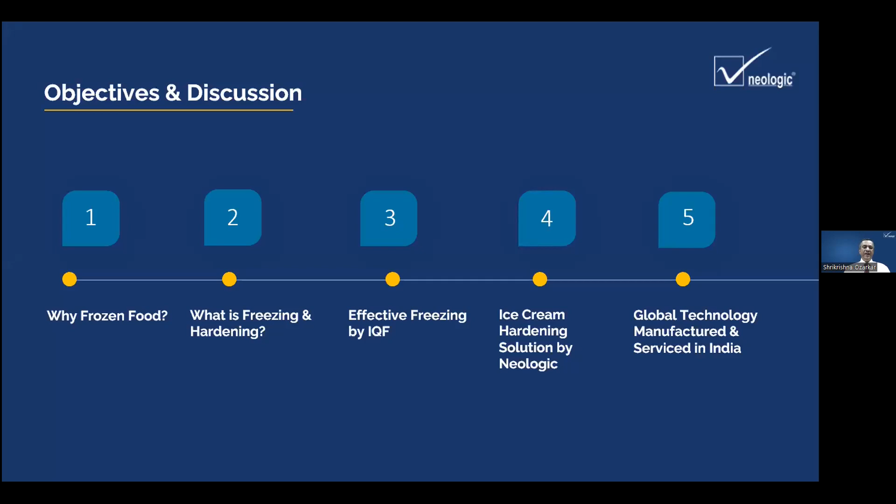So first, let's try to understand why frozen food. Let's understand the market scenario as well. The frozen food market is one of the largest and most dynamic sectors in the food industry. In spite of considerable competition between the frozen food industry and other sectors, extensive quantities of frozen food are now being consumed all over the world.

Let's also understand freezing and preservation by freezing. Freezing, being one of the best techniques of food preservation, is widely used for retaining taste, texture, and nutritional value in agricultural products over long storage periods since a long time now.

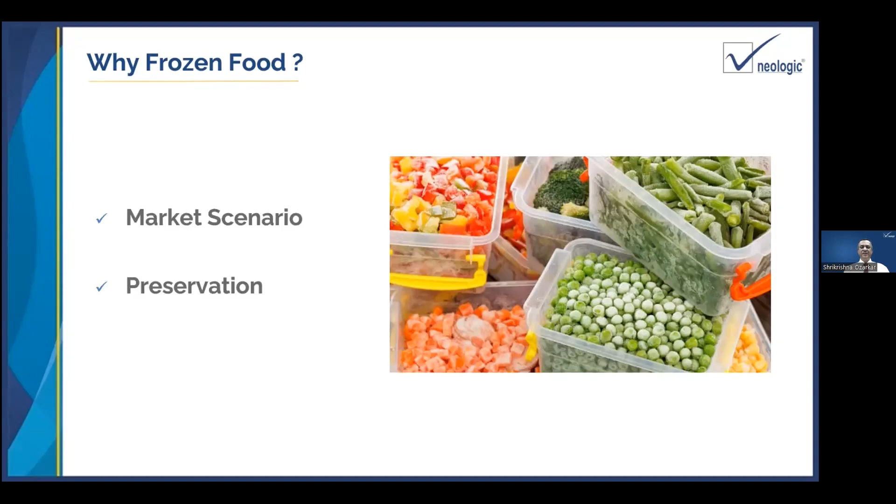So what is freezing and hardening? Let's see. The freezing process is a combination of beneficial effects of low temperature, at which microorganisms cannot grow, chemical reactions are reduced, and cellular metabolic reactions are delayed.

Let's also understand freezing for preservation. Freezing delays spoilage and keeps the food safe by preventing microorganisms from growing and by slowing down the enzyme activity that causes the food to spoil. As the water in the food freezes into ice crystals, it becomes unavailable to these microorganisms for growth.

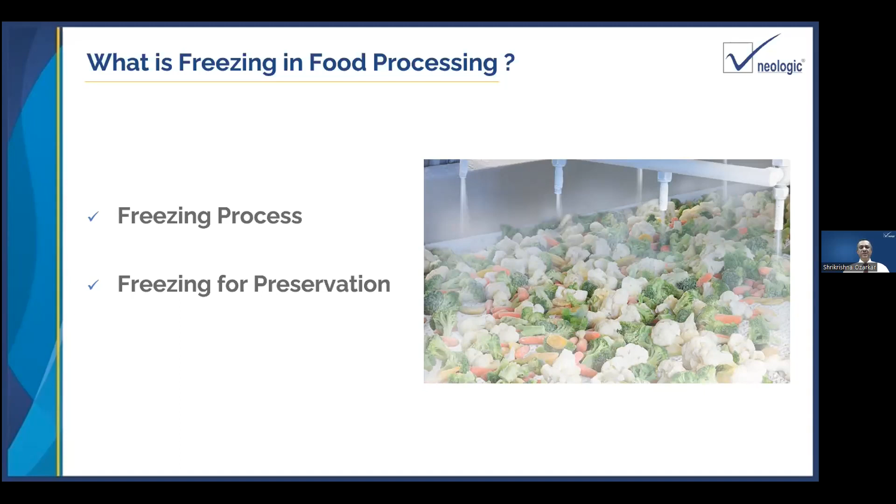Now let's look at ways of freezing, starting with the spiral freezer. The picture you see in the slide is a spiral freezer, which can be used for various applications - ready to eat items, fruits, vegetables, or many other items including paneer, cheese, meat, or chicken. The freezing process accomplished with spiral freezers is very popular these times, mainly due to the space saving and energy saving features of spiral freezers over conventional freezers.

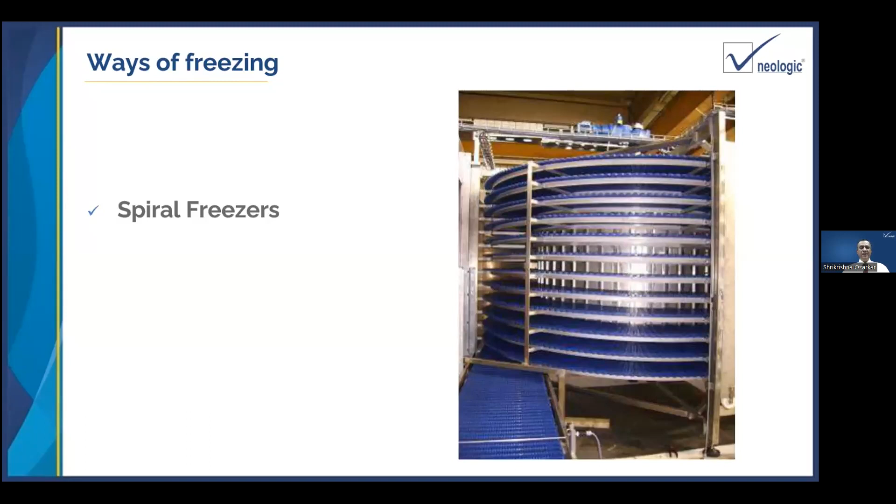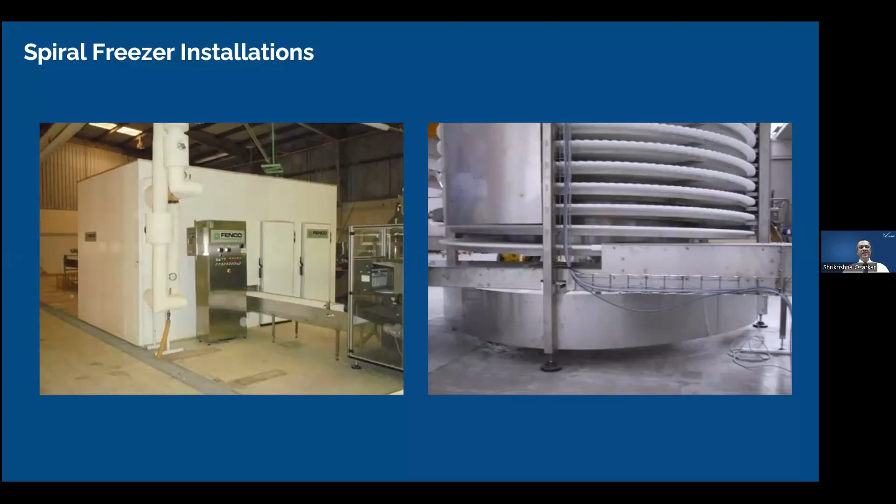Spiral freezers can be used for a variety of applications in the food industry, as I mentioned earlier. Let me explain some other spiral freezer installations in the photo here. On the left-hand side, you see a complete cabinet for the spiral freezer. On the right-hand side, the spiral freezer under construction. Here are a few more photos with the evaporator coils and fans under installation, which you can see at the bottom.

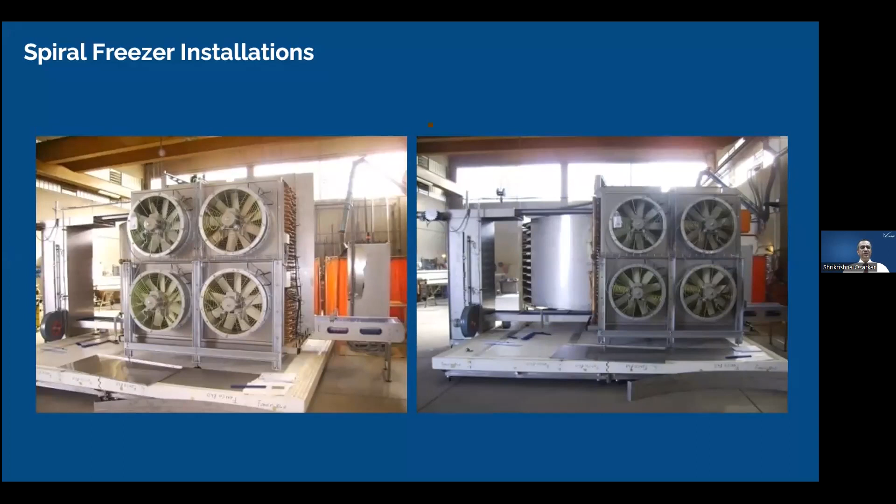The second method of freezing we are going to talk about is individual quick freezing, what we call IQF. IQF is one of the best ways for many food items, and it has gained a substantial market in the last one and a half decades.

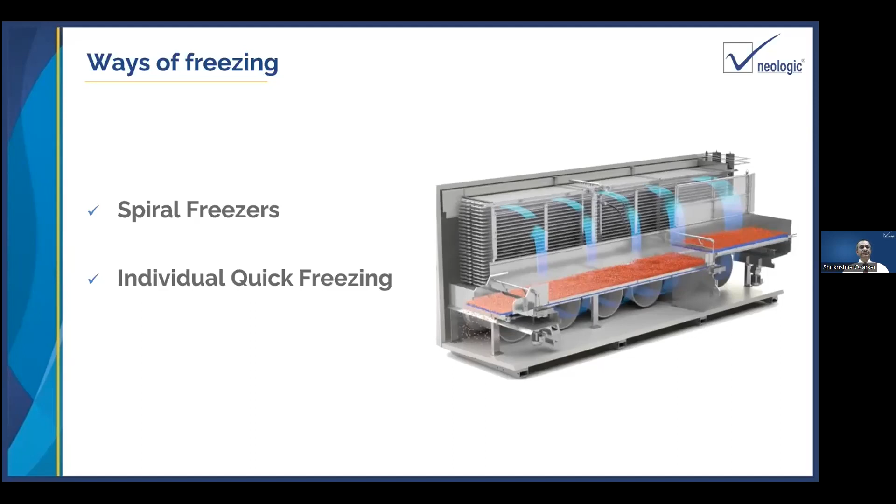So let's understand effective ways of freezing by IQF. What is IQF? In the food industry, IQF stands for individual quick freezing, indicating that each piece of food is frozen separately from others. It is not a block, it is not a lump, but completely individual pieces that are being frozen. That is why it is called individual quick freezing. Originally, this was developed as a specific solution to block or cluster freezing of small size products, to preserve quality and give unparalleled convenience to the end users.

This method of freezing has a unique ability as it freezes all product components individually, keeping them separate from each other, which is very important. This makes it very easy to individually freeze and store products like peaches, berries, grapes, corn, peas, fish, shrimp, cheese, paneer, and other poultry items without them sticking to each other.

This technology freezes each piece individually using the fluidization technique, where the product is suspended on high velocity air, leading to freezing of food products in 10 to 12 minutes, whereas the conventional method can take almost 3 to 4 hours.

Thus, most of the properties of the parent food are preserved as the formation of big crystals, which damages the tissues of food material, does not take place. Moreover, it also presents the advantage of saving energy and time, as one does not have to thaw or defrost the whole packet to take out only a portion.

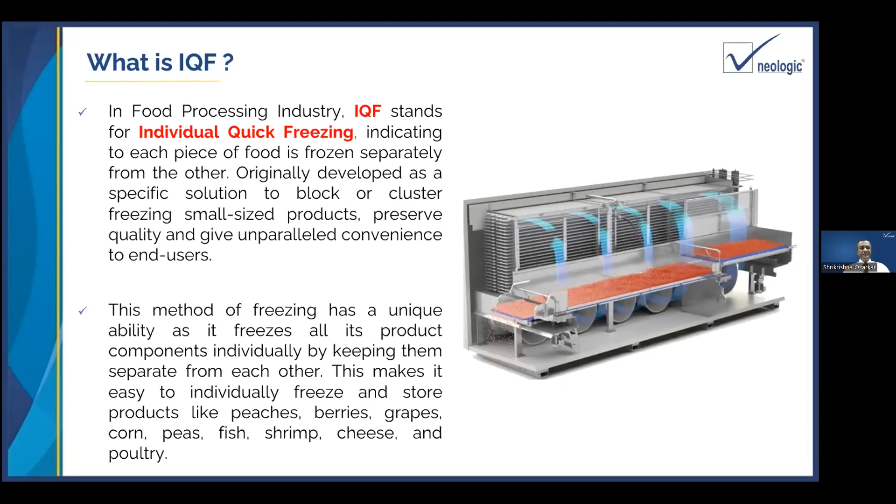So what is the difference between frozen and IQF? There are a lot of products appearing in the market, but what is the difference between the frozen product and the IQF product? The main difference is the size and quantity of the frozen product. Cold storage freezing is used for large volumes or bigger size products, such as whole chicken or packed meat. IQF, on the other hand, is ideal for freezing smaller products such as small fruits, vegetables, fruit cubes, cheese, pasta, paneer, etc.

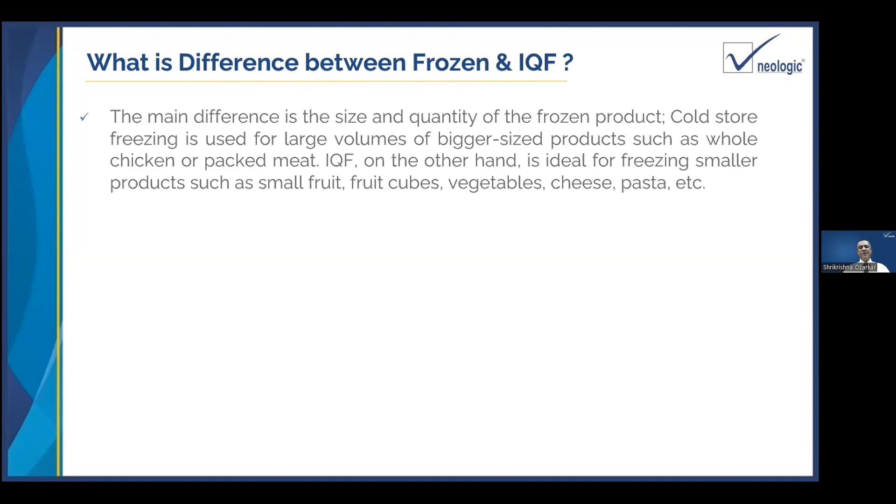Mechanical IQF freezers work on the principle of cold air circulation, which flows from underneath the bed plate or transport belt with the help of fans. This cold airflow passes through the pieces of individual product in a circular motion while the product is also advancing through the freezer towards the exit.

Here, the temperature of the air is approximately between -18 to -34 degrees, and the velocity of the air is kept very high, ranging between 2 to 5 meters per second. This process is economical for producing many IQF products, as a variety of sizes and shapes can be accommodated.

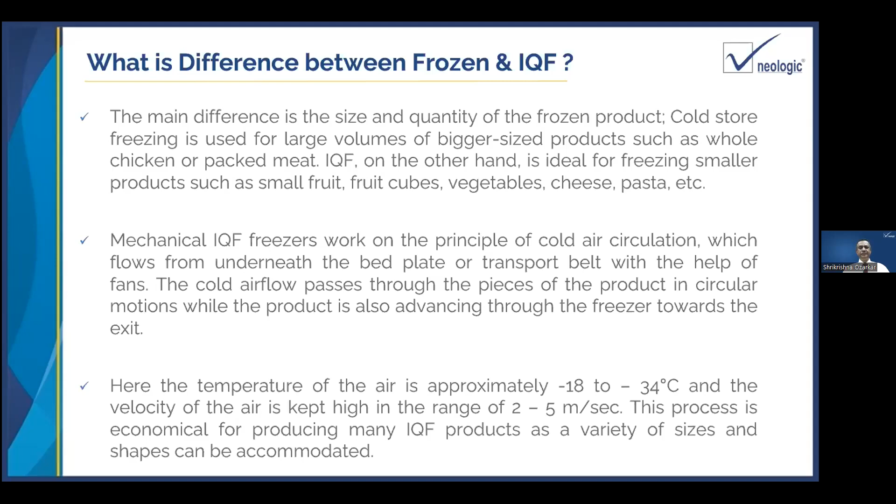So some examples of installation of this particular IQF. On the right hand side, you see the entire cabinet. On the right hand side of the cabinet, you see the shaker, which is coming out from the product from the inside, the control panel, and some photographs of the product inside.

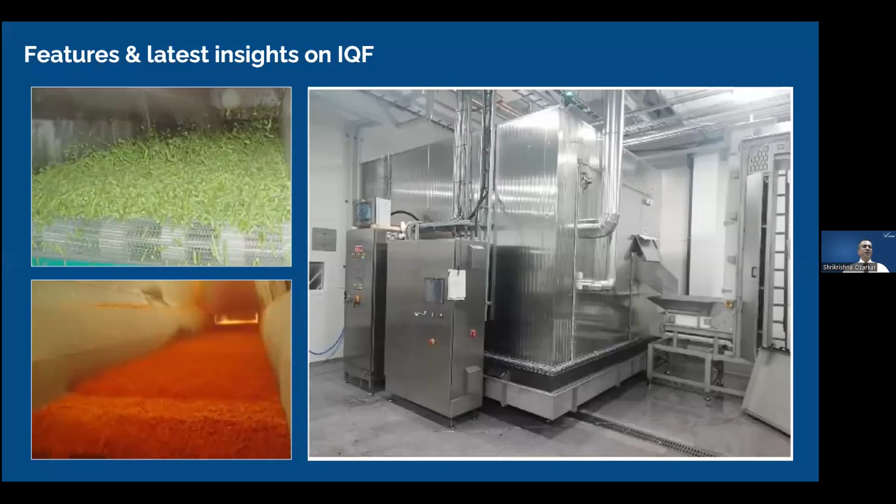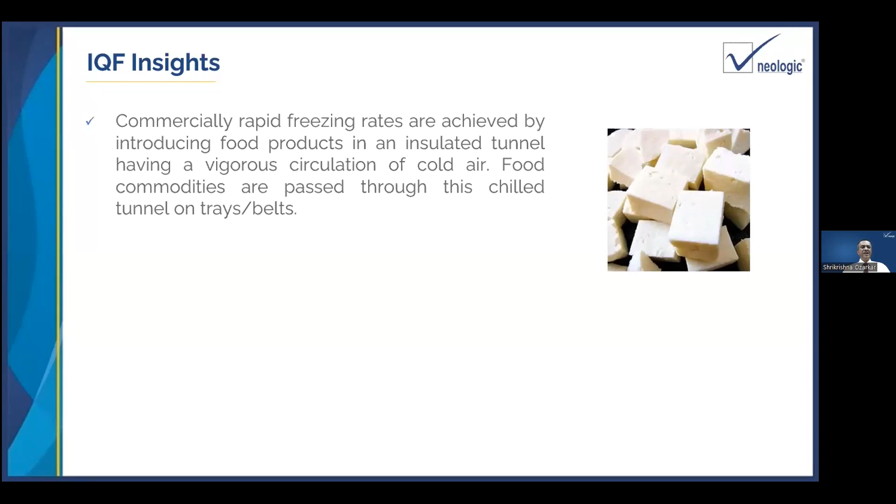So let's understand some of the insights of the IQF, that is individual quick freezing. Commercially, rapid freezing rates are achieved by introducing food products in an insulated tunnel having vigorous circulation of cold air. Food commodities are passed through this chilled tunnel on trays and belts.

Food is fluidized to form a bed of particles, which is then frozen by forcing cold air upward through the particles. The upward motion of the air through the bed partially lifts or suspends the particles, leading to speedy freezing of the particles.

One advantage of this IQF method is that the freezing process takes only a few minutes, and the exact time depends on the type of IQF freezer as well as the product. The short freezing prevents the formation of large ice crystals in the product cells, which destroys the membrane structure at the molecular level. This makes the product keep its shape, color, smell, and taste after defrost to a far greater extent.

Another advantage of IQF technology is its ability to separate units of the product during freezing, which produces higher quality product in comparison with block freezing. This is important for food sustainability, as the consumer can defrost the exact quantity needed.

Rapid freezing also prevents undesirable large ice crystals from forming throughout the product because molecules don't have time to form into characteristic six-sided snowflakes. Slow freezing also creates large destructive ice crystals, and during thawing, they damage the cells and dissolve emulsions.

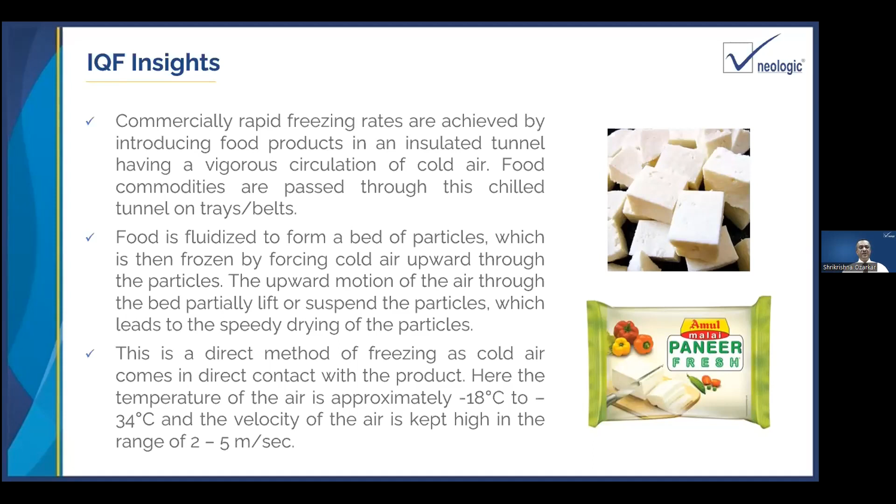Then we have a possibility of adjusting the airflow, belt speed, as well as vibration. This variation we can use for different products in a different way.

Designed for longer running hours without defrosting, so this can go on for a number of days based on the product and the moisture content, of course.

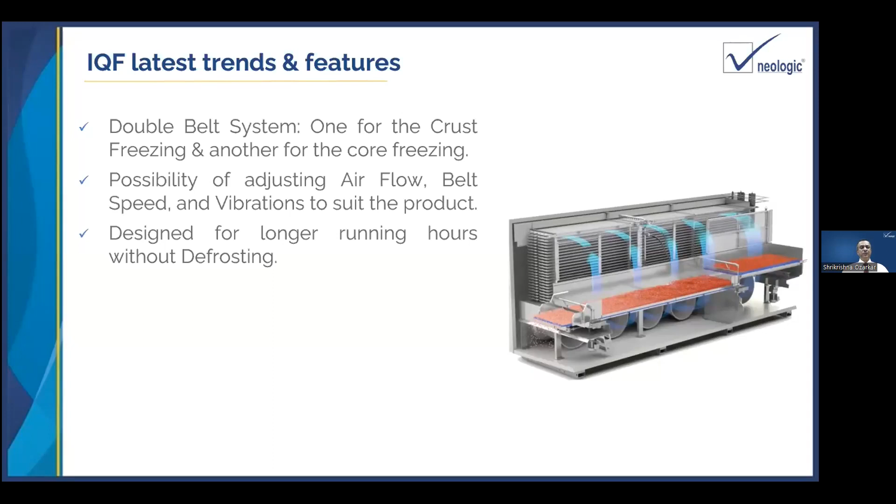Hygienic design, this is what you can say a hallmark of Neologic design, with easy access and 100% made in stainless steel. Insulated floor, insulated cabinet walls - these are going to maintain the desired temperature we want. And the evaporator coils are suitable for hot gas defrosting as well as water defrosting.

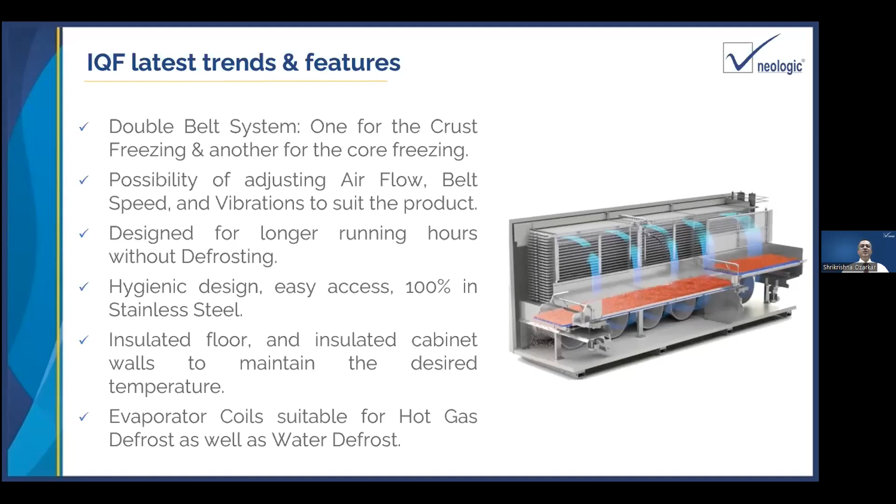Advantages of our IQF design, we will try to cover this. First is customization - as such, we do not have any fixed model. We actually prepare every machine based on the customer requirement and to suit his conditions. So based on his product, based on his capacity, based on his requirements, we are actually going to design each and every individual machine. So every individual machine is going to be specifically made for you - not something ready-made or made for somewhere else. It is going to be particularly made for you.

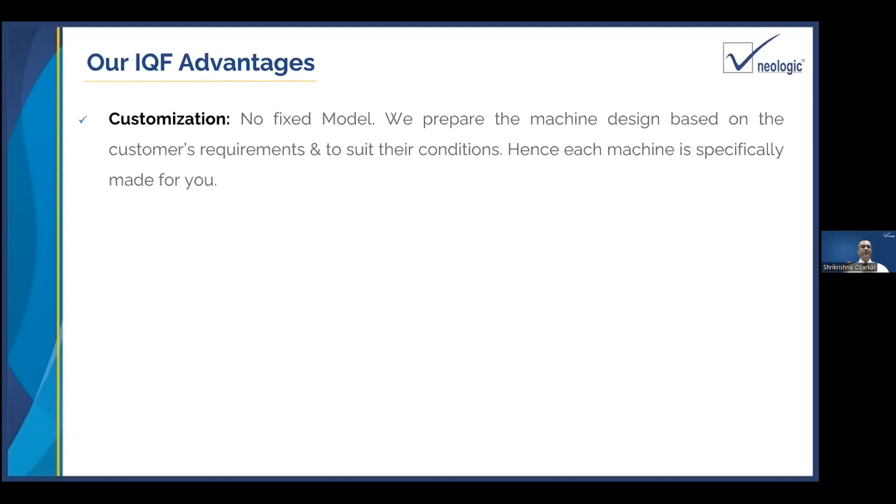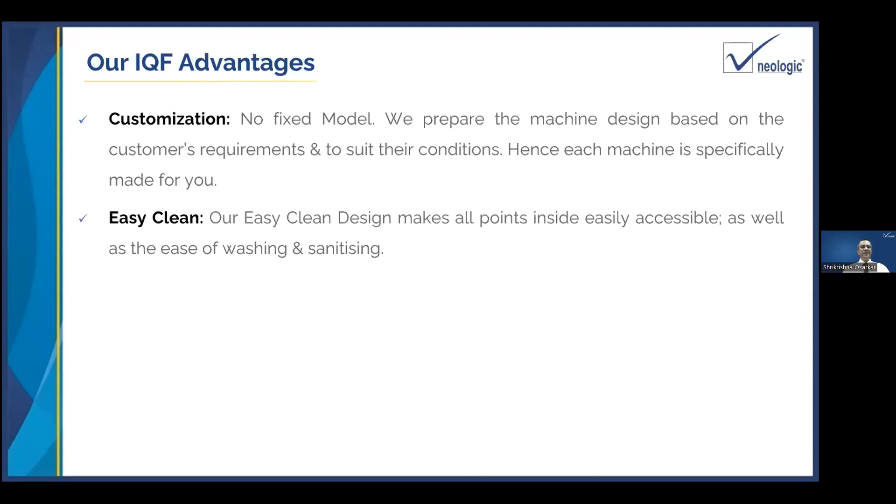Next is Easy Clean. Our Easy Clean design is going to make all points inside easily accessible, with ease of washing as well as sanitizing. Adaptability - as I mentioned, I can change the airflow, I can change the belt speed, I can change the flow direction. Based on that, I can adapt this design for various particular products, and this can change the efficiency of fluidization and subsequently crusting and final freezing.

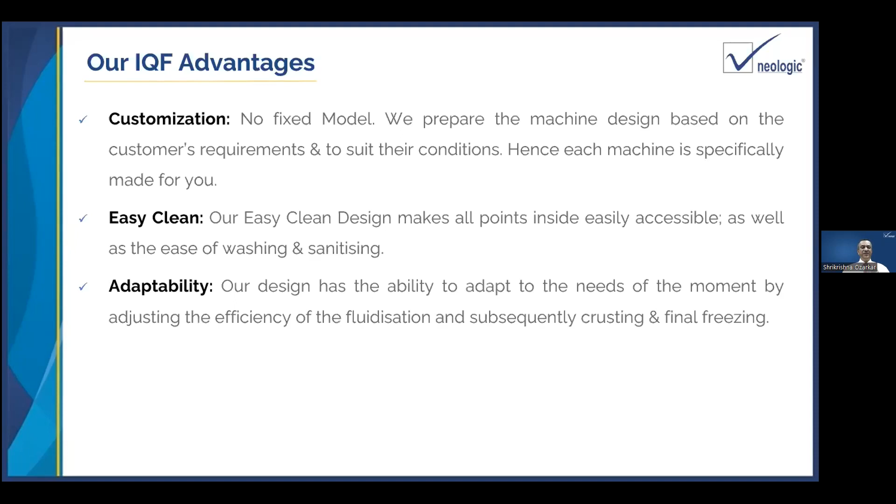ASR system - this is one of our USPs, what you can say. This design completely uses ASR, what we call an automatic system for removing the frost from the evaporator during the tunnel work. Thanks to our jet of dry, high pressure air, the aim is to maintain constant ventilation conditions and temperature heat exchange as much as possible, reducing the defrosting stops, even running for several days.

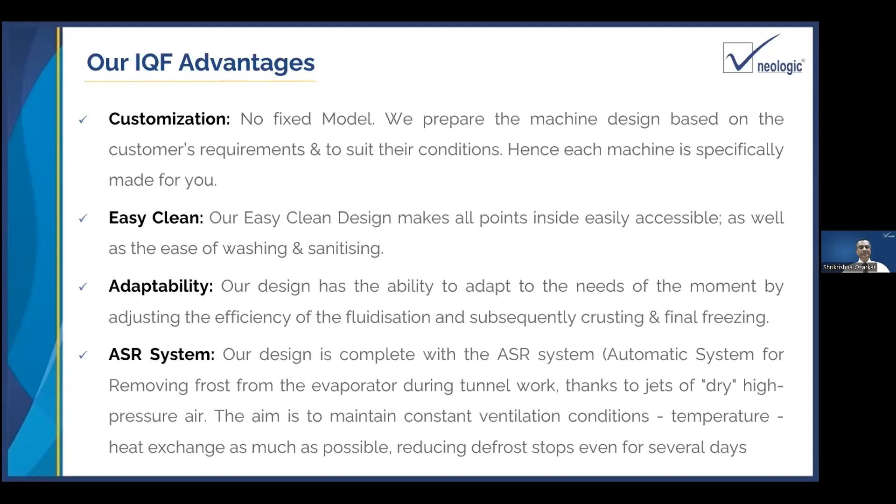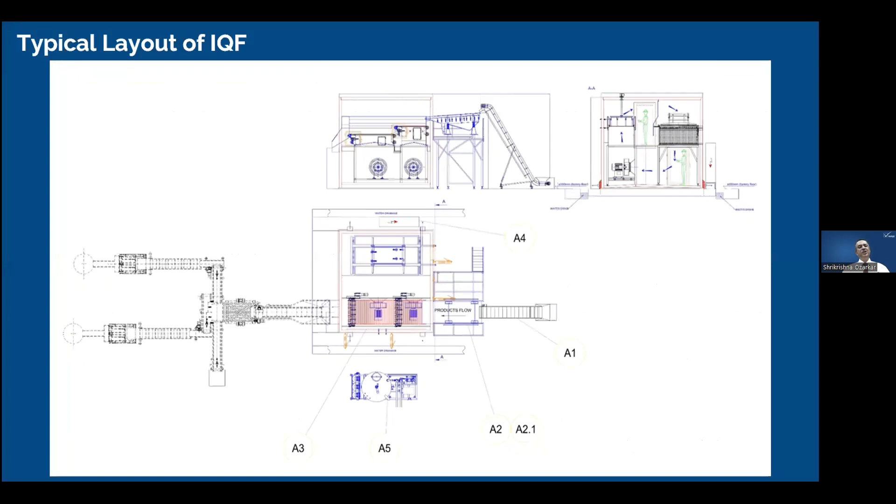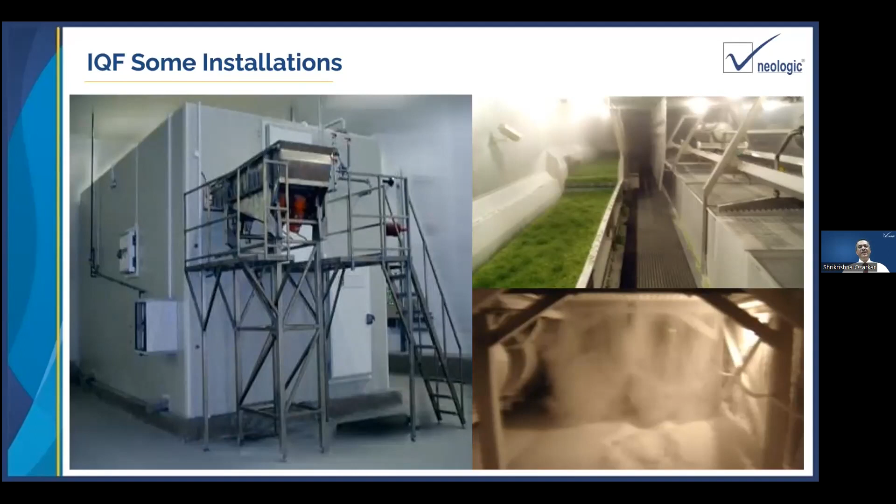Some of the installations - you can see IQF, the shaker on top, the infeed coming over here. It goes inside the two belts, the evaporator coils and everything is inside, and everything can be monitored from the monitor outside. On the right hand side, you see some photographs of the product inside under freezing.

Welcome to all the participants for the second session of this webinar. In this second session, I, Shreesh Kashyap, will take you through some aspects of ice cream hardening. Now, ice cream we have kept especially as a focus subject because ice cream by itself is a very large industry and it is growing at a very large pace.

And the size of the plants is also growing up, and the bigger the plants, the greater the need for better, effective hardening throughout the entire ice cream plant. Now, as far as the ice cream is concerned, once it's made, you have a very good product. But unless you harden it, you will not be able to keep it for long.

So essentially, ice cream has to be hardened up to a core temperature of -20 degrees for its storage for a long period of time, which is needed very much until the time it is distributed. And in fact, even at the retail end, it has to be stored at -20 degrees until it is actually bought by the consumer for consumption.

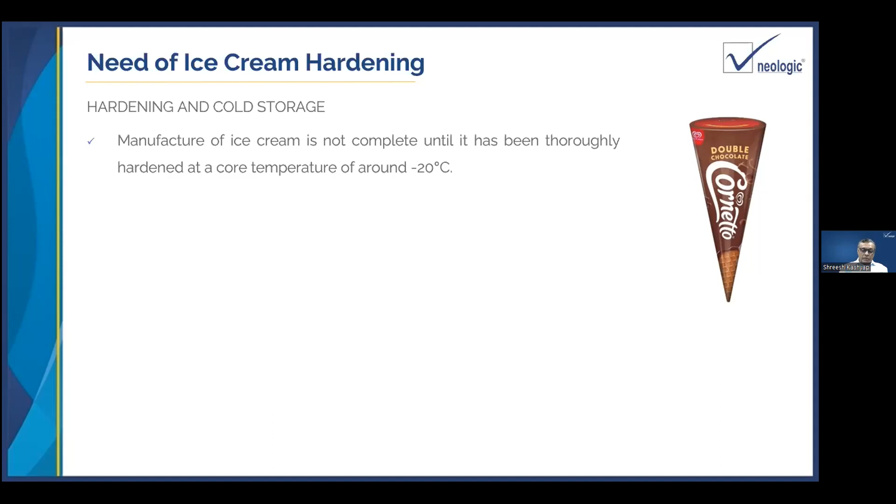Now, as far as ice cream products are concerned, excepting for a candy or stick product, which is made essentially in a stick machine, it comes out fairly hardened. But the rest of the products - cups, cones, tubs, and bulks - have to be hardened. Now, hardening can be done in a hardening room as well.

But essentially, in the next two points we'll go into where the speed of hardening plays an important part. Now, in a hardening room, basically the hardening happens in a very, very slow time. It happens over a period of many, many hours. And of course, the room is also occupied in the process of hardening - the cold room is occupied.

Whereas in a hardening tunnel, it is hardened over a period of say 30 minutes to 1 hour or 2 hours, depending on the size of the product. Now, when you harden the ice cream, essentially what happens is the water molecules in the ice cream are actually frozen. And when you're doing slow freezing of the water molecules, the size of the ice crystals are much bigger. Whereas when you do it much faster in a hardening tunnel, the size of the ice crystals are very small.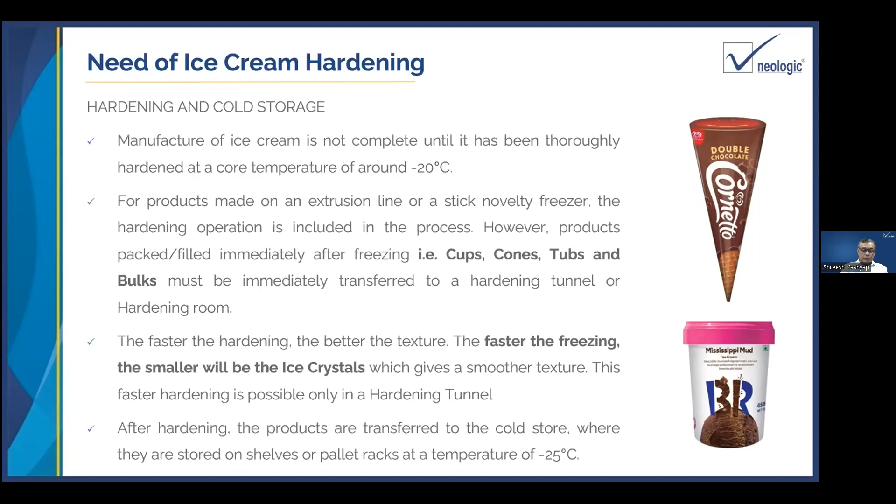Now, in a continuous freezer, when you are actually producing ice cream, the conventional outlet temperature desired for the ice cream is minus 5 degrees. And at minus 5 degrees, 48% of the water in the ice cream is already frozen. Now, with 48% of the water frozen, the ice cream is not yet hard - it is still pliable, very soft, and will not retain its shape. It is not good enough for packing, transportation, or long storage.

So what it needs is hardening. And as I said, in hardening, what you're looking at is a core temperature of the product at minus 20 degrees. At this core temperature of minus 20 degrees, 87% of the water is frozen into ice crystals. At this temperature, it is sufficiently hard to retain its shape as well as other properties, and it also achieves the right ice crystal texture, so it can be stored for a long period of time. There's no need to go lower than this, because it doesn't add value in terms of better product retainability.

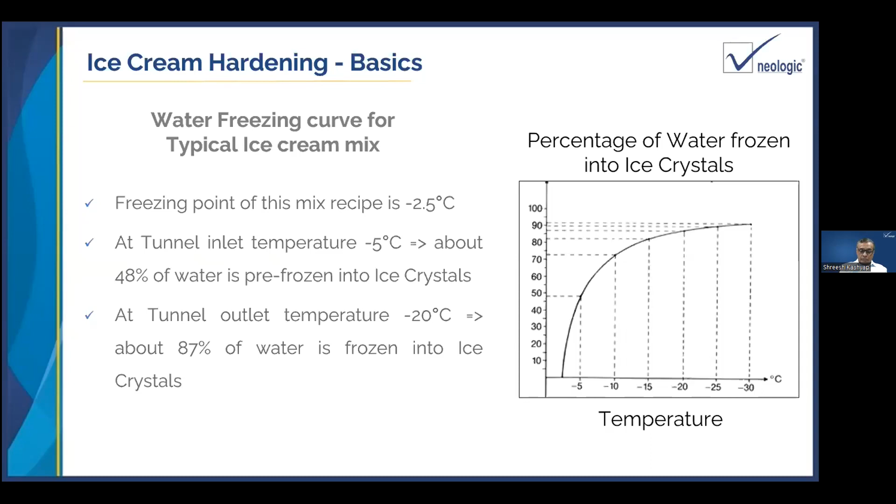Now, in terms of hardening the tunnel, when deciding the design of the hardening tunnel and what kind of hardening is required, there are different aspects that govern the design. I'll take you through some of the main aspects of it.

One of the things that decides the speed of hardening and the amount of hardening required is the mix, the recipe of the ice cream mix, the TS of the ice cream, and other ingredients such as stabilizers, and what kind of viscosity vis-a-vis temperature comes out after the freezer.

The second part is the percentage of water already frozen before the hardening tunnel. Once it comes out of the freezer at minus 5 degrees, 48% of the water is frozen. But by the time it is packed and going into the tunnel, you may lose 1 or 2 degrees. It may enter the tunnel at minus 4 or minus 3 degrees.

This is an important part for us to get from you as a manufacturer — these exact temperatures and conditions — so we can design the tunnel properly for you.

Another very important part is the freezing air temperature. The lower the air temperature, the better, in terms of achieving a speedier hardening. Here we have different refrigeration temperatures that are possible.

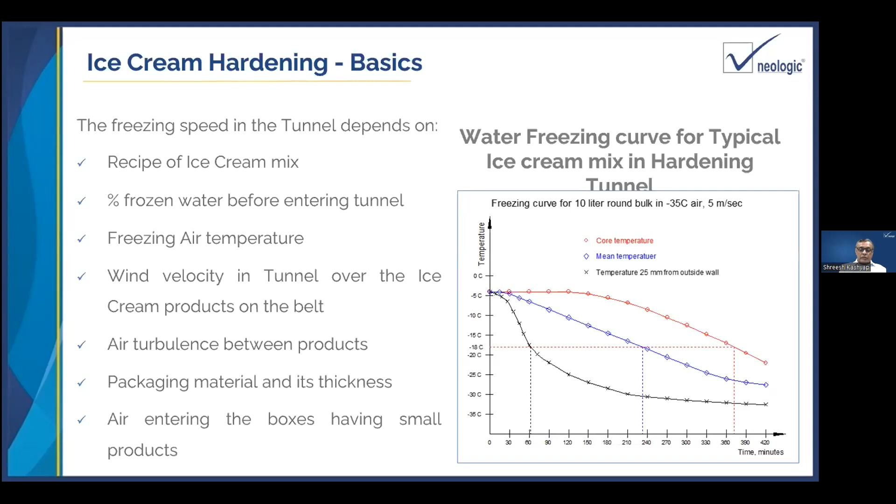And finally, a very important part is the packaging material — the primary and secondary packaging. If cones or cups are kept in boxes, what is the size of the box, what is the material thickness and material type, and how much air it leaves into the product — that makes a very important part, and this is something we look at together when deciding the tunnel for you.

Now friends, we will look at some of the hardening solutions from Neologic Engineers. Neologic Engineers manufactures hardening tunnels in India, both spiral as well as straight line tunnels.

I will take you through some of the salient features of our tunnels. I would touch more upon the spiral tunnels, because these are more complex, and more so these tunnels are required for high capacity plants, where invariably a spiral tunnel is needed. In case of Neologic tunnels, we have some features which add to your reliability.

We use a direct drive belt, and the drive is placed outside the cabinet, including the gearbox, and that makes it accessible as well as much more maintainable. And of course, the direct drive is much more efficient, not only in terms of power consumption, but it also helps ensure that belt breakability is reduced and minimized to a large extent.

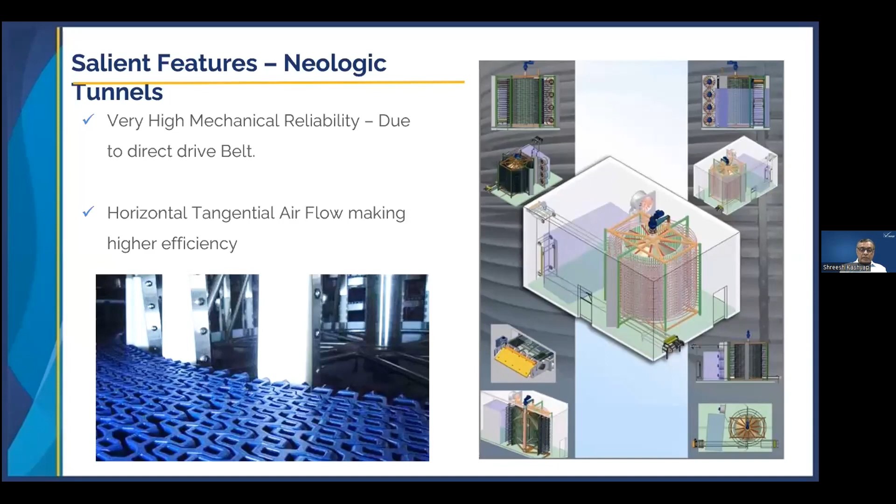Also very important is the airflow. As I told you, we use a tangential and tangential horizontal airflow. You can see in some of the small diagrams we've shown that one of the spiral tunnels needs as many as four fans for efficient airflow inside the tunnel. This design means we had to have more fans inside the tunnel, and of course more fans adds to the cost, but it also adds to the performance and reliability of the equipment.

Our tunnels have other good features like a long working cycle, and one important part that aids this is the fin spacing of the fins in the evaporator unit inside. We have a larger fin spacing, and the evaporator is also oversized because it has to take care of conditions that aren't always expected, like large amounts of humidity in the ambient air, especially during the rainy season, and varying conditions in the production hall itself. We need to size the evaporators for the worst condition, so ours are larger, which adds to the cost of the equipment.

Another important part is that our insulated cabinets have higher thickness. We say this because while we choose the thickness as per the requirements of Indian tropical conditions, we have also seen that some of our competition coming from Oriental countries, like China, are designed to be very minimalistic and have a much lower insulation cabinet thickness, as we have seen in practice ourselves.

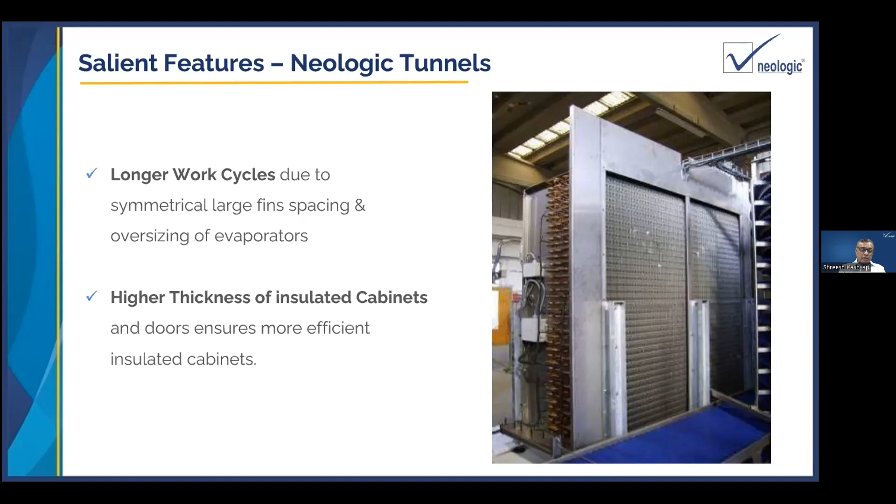Cleanability of the tunnel is also very important, because the hygiene and sanitary conditions inside the tunnel have to be maintained. During the process of hardening, some of the smaller products tend to fall off the belt, so over time the products have to be cleaned out, and ice cream matter that has fallen down has to be cleaned out to maintain sanitary hygiene conditions inside.

In our case, we look at two separate parts: the belt cleaning and the drum and inside portion cleaning. For belt cleaning, we have a belt washer at the beginning itself. For inside cleaning, we use high pressure jet pumps along with nozzles strategically placed, with an adequate number of nozzles at all places on the belt and on the floor as well. The system operates in an automated, sequential manner so that all parts of the hardening tunnel are cleaned efficiently.

Another part of the tunnel is the safety aspect. This is just one part I want to touch upon, though there could be others as well. This is about the safety system for over-height products, because if the operator accidentally places a product over a product, or bigger size products, it will result in jamming of the products inside and cause a stoppage of the tunnel. So this is a safety feature for that.

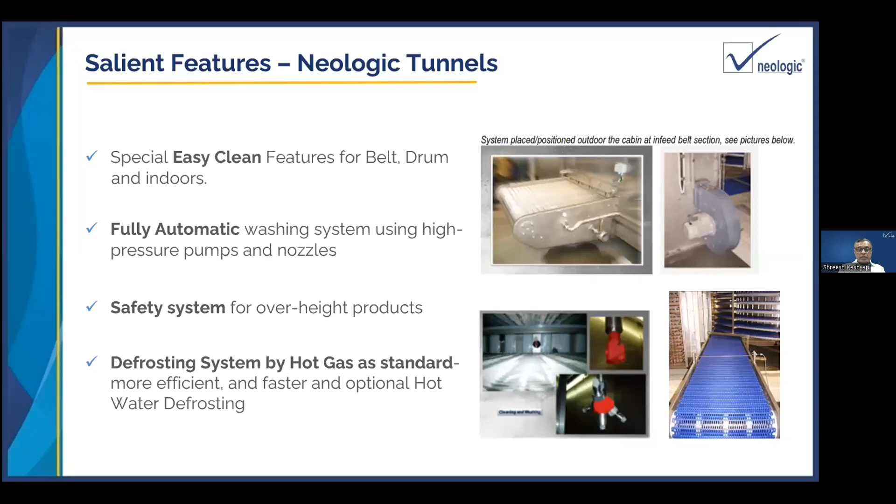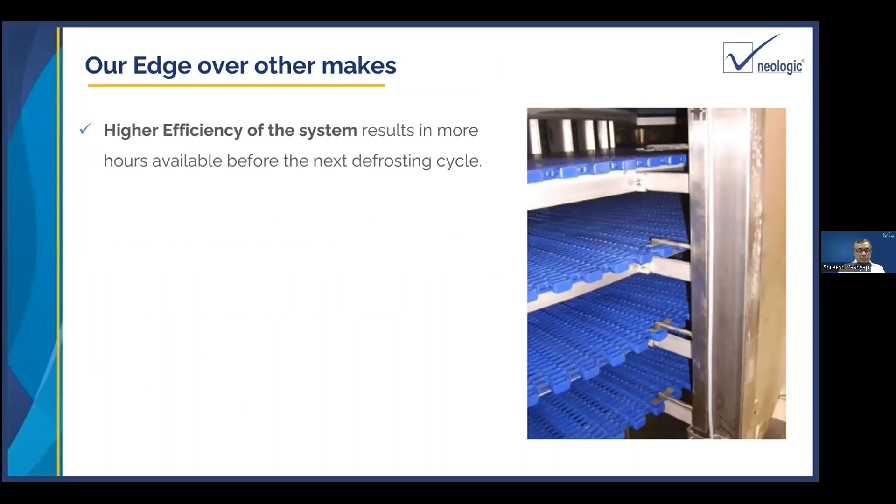I'd like to touch upon aspects where we have an edge over other makes, basically the high efficiency of our system, more in terms of availability and hours available for production. This comes because of two things: we have a uniquely designed air filtering system that catches moisture before it reaches the evaporator, and a system to remove frost periodically during the production cycle itself, minimizing ice buildup on the evaporator and extending the defrost interval needed for the hardening tunnel. This means more production time available and lower overall operating costs.

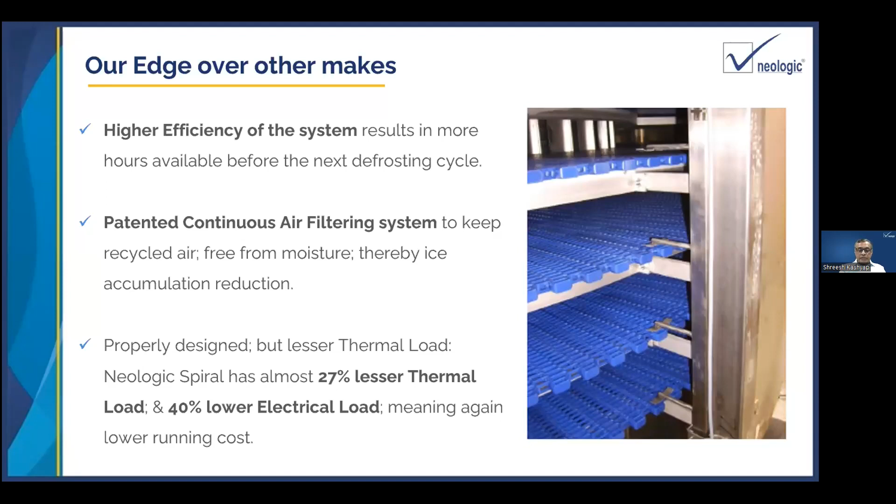One important part is actual data we've captured. I'm not comparing against European makes that are imported, but against some Chinese makes. This is the actual comparison of our design versus theirs. Our thermal load requirement was 27% lesser, and because of our efficient direct drive system and selection of fans, we have a 40% lower electrical load. These result in much lower operating cost for you, and I'll show actual comparison figures as we go further.

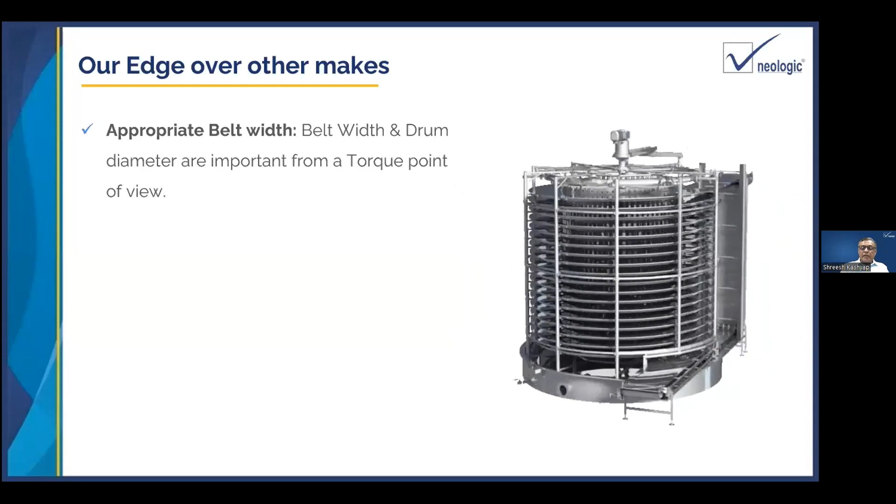Other aspects where we optimize design are belt width and drum diameter. We design the tunnel for each application separately, customizing for optimum operation and reliability. We don't go with a standard belt width; since we source belts from reputed global manufacturers, we get the right width and material for your product, and accordingly select the right drum diameter, which is important from a torque point of view for continuous operation and reducing belt breakage. That aspect is handled much more properly here.

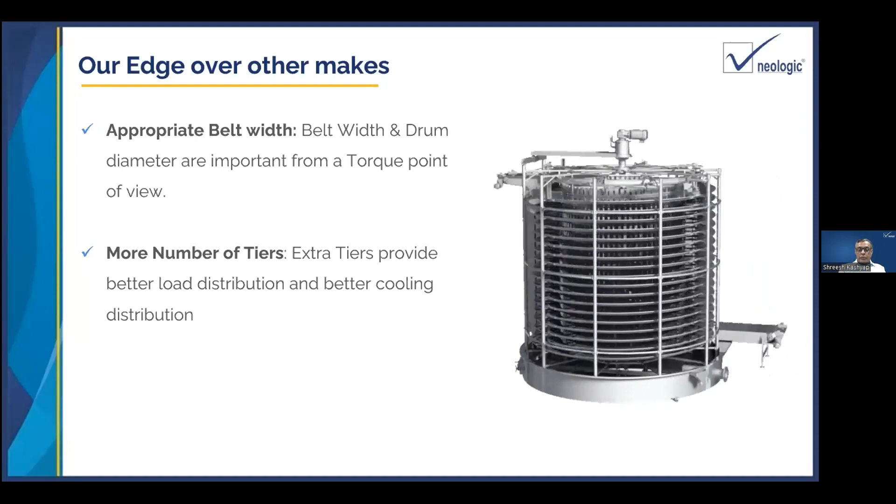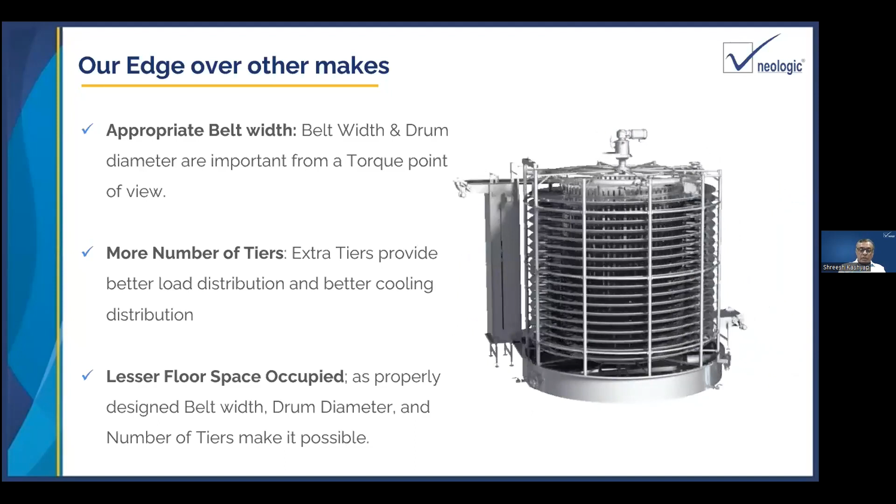A lesser belt width or diameter means more tiers, but the extra tiers help in two ways: better load distribution and cooling distribution, but also a lower footprint in the production hall. Because of this, our tunnels occupy almost 15% lower floor space than some standard Chinese makes available.

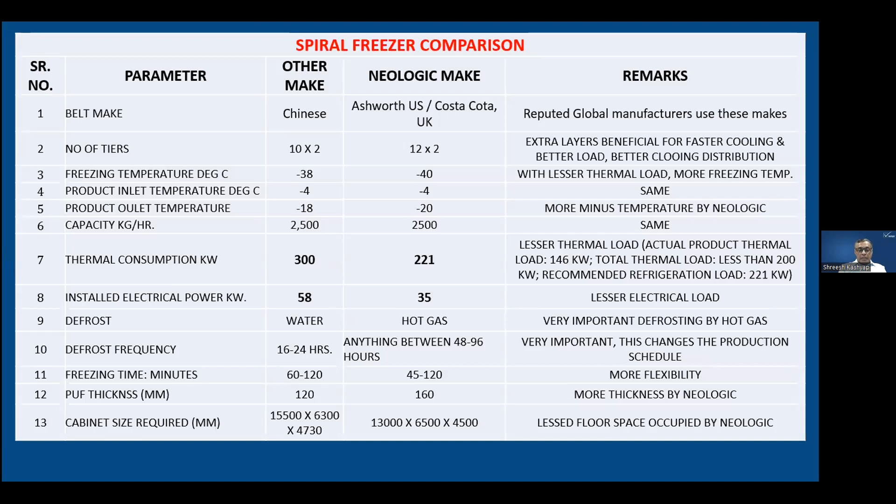For a plant running continuously around 18 to 20 hours per day and about 250 days per year, this reflects almost 1.2 crores in operating cost savings for you. In a normal, standard way, the extra cost you'd pay for our tunnel versus a Chinese tunnel can pay off in just around 2 years, and thereafter it's a net saving for you year on year. This is where Neologic equipment makes sense in the overall scheme of things.

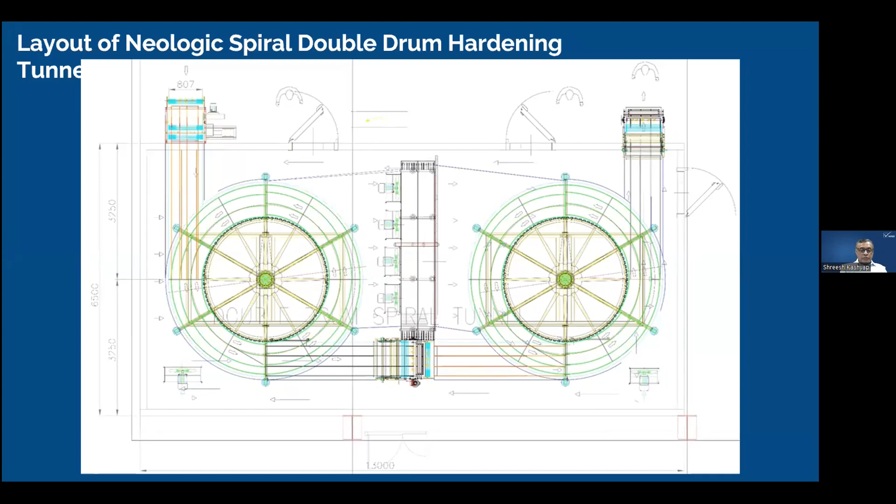Having talked about the double drum, we can also make a single drum tunnel based on your plant layout. If your storage is on the first floor, it makes sense to have products taken up, hardened there, and then go directly into cold rooms on the first floor after hardening, or vice versa. Spiral tunnels can be fully customized as per your requirement.

Now, talking about solutions from Neologic, I'd like to once again touch upon our full flexibility in designing for you, not only in terms of the number of drums required, but also in terms of the orientation.

Also, we want to know from you: what are you using the tunnel for? Is it for bulk products only, or for both bulk and small products, or only for small products? Accordingly, we'll be able to design not only the thermal load, but also the belt and the drum diameter for your specific requirement.

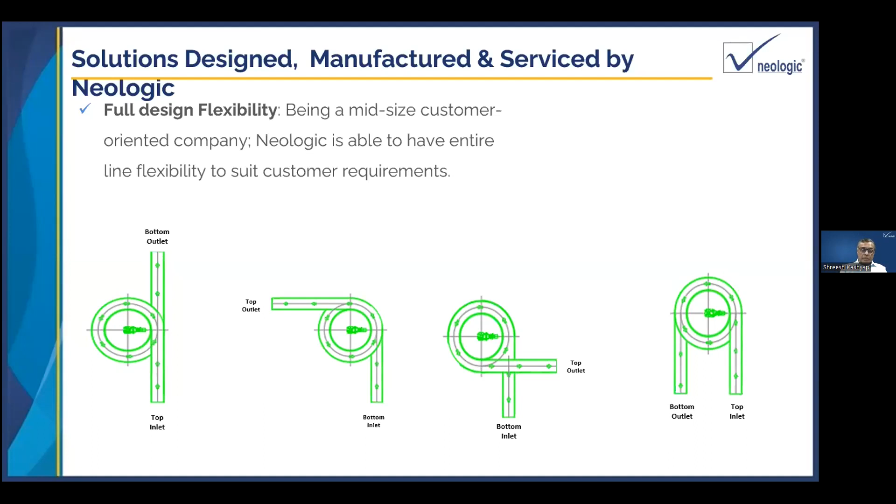But if you want to harden both products together, we can design the belt with a partition in between, so you can have small products on one side and bulk on the other. This way, at the exit end, you can take the products to the requisite place in the hardening room, making it easier for further distribution and pickup by the operators.

Our tunnels are fully PLC controlled with a color HMI. For different products, we can build in different recipes in terms of time and temperature required. You can customize it, and have operator control features for fan speed as well. All this can even communicate data with your main SCADA to give you full data about the hardening operations happening in your plant.

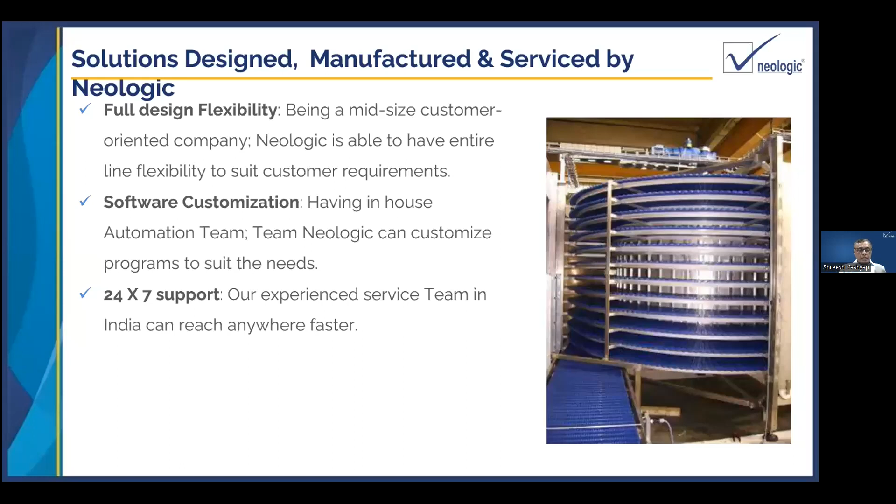Apart from that, since it is manufactured in India, we have our service team located in India. They're available 24/7 for any video call support or logic support that you need. But if you need a person at your plant, he can be there within a day's time, ensuring minimum downtime. You can also undertake an annual maintenance contract to ensure your equipment runs continuously without any stoppage.

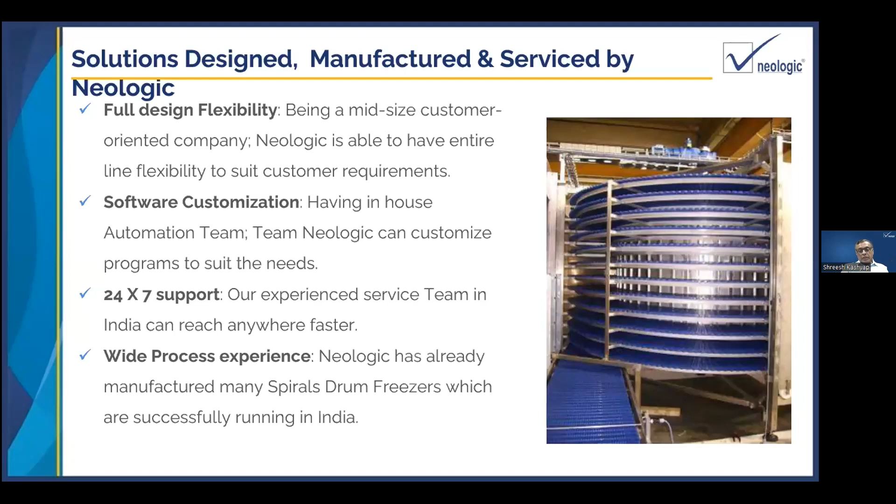I'd like to finally add that we have a wide range of experience. Neologic has been manufacturing a number of spiral tunnels for different applications, and our teams are fully experienced to design, manufacture, and maintain them for you, with after-sales service for long years to come.

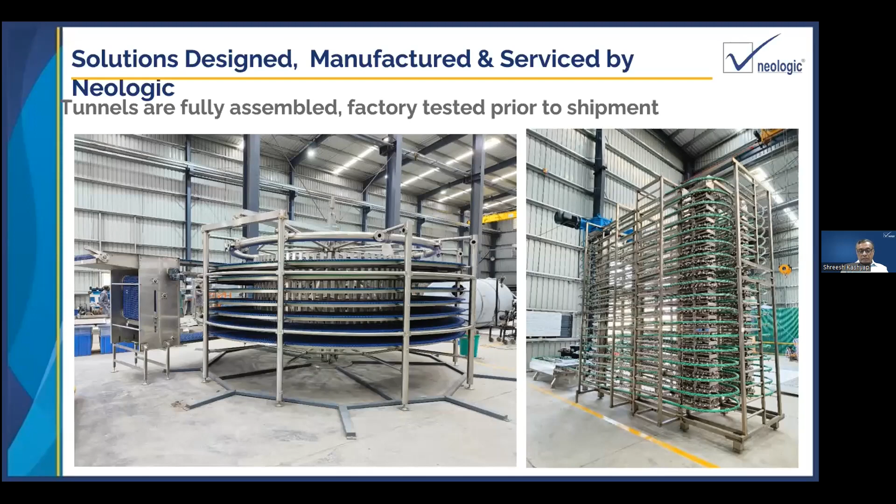As I said, our tunnels are made in India, fully manufactured and serviced in India. These are some photographs of the spiral tunnel during the process of manufacturing at the shop floor. On the left hand side, and on the right hand side is another straight line tunnel being manufactured for ice cream applications. These are a few photographs to share with you.

So this is where it is. I come to the end of my presentation on ice cream hardening solutions. During this process, we touched upon the basics of hardening for ice cream, the typical requirements of hardening tunnels, and some of the salient features of Neologic hardening tunnels.

At this stage, I would like to invite you to ask any questions that you have, and we'll be very happy to answer them.

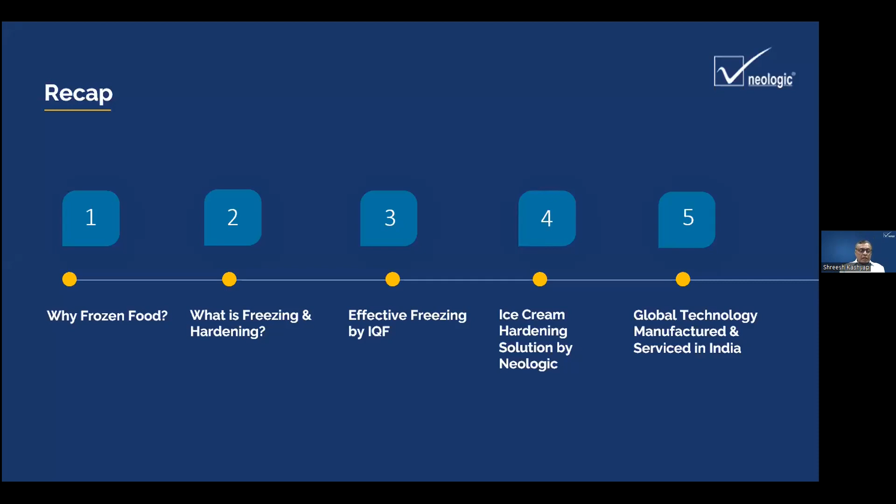Yes, we'll start the question and answer session. The first question is from Mr. Mohammad Hassan. He has asked, can we use IQF to freeze ice cream?

Well, the design of the IQF is different. As we covered earlier, it is for designing hardening of very small products, like peas or small pieces of vegetables. Ice cream is a different kind of product, and the requirement for hardening and freezing ice cream is different. In principle you can use it, but it will not be efficient — it will not be the right way to do it. Equipment wise it is the same, but design wise it will be different.

Next question is again from Mr. Mohammed: does IQF work with ammonia, freon, and nitrogen? As a backup refrigeration system, you can design it with ammonia or with freon. The only difference is that the evaporator design changes when using an ammonia system versus a freon system, but essentially what you need is a certain temperature and amount of air.

Coming to nitrogen, that is a different kind of hardening altogether — a totally different technology. The hardening process is the same, but it's a totally different technology and equipment. I don't think we will cover it at this stage right now.